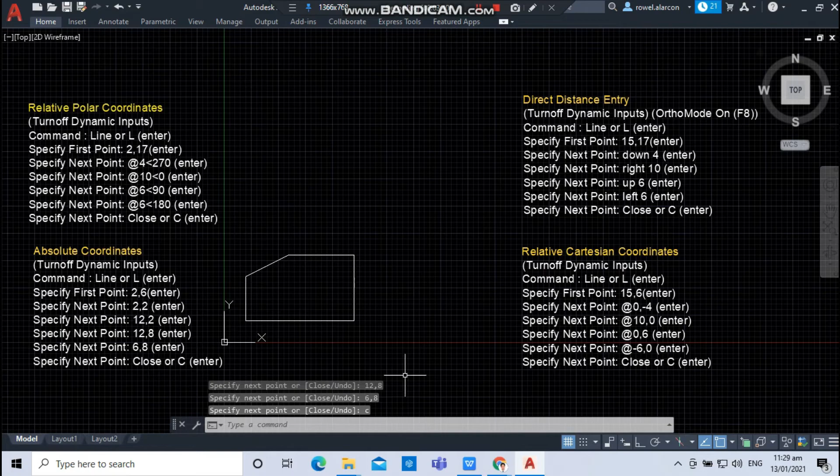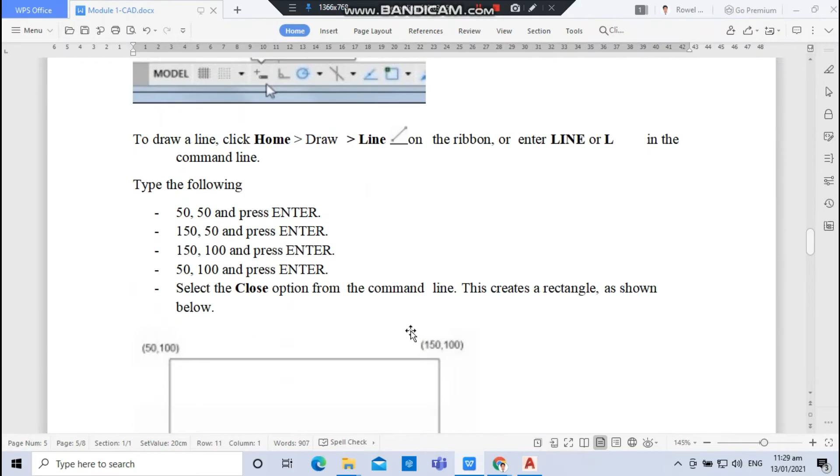In this example, you will draw lines by defining its endpoints in the relative coordinate system. In the relative coordinate system, you define the location of a point with respect to the previous point. For this purpose, the symbol @ is used before the point's coordinates. This symbol means that the coordinate values are defined in relation with the previous point.

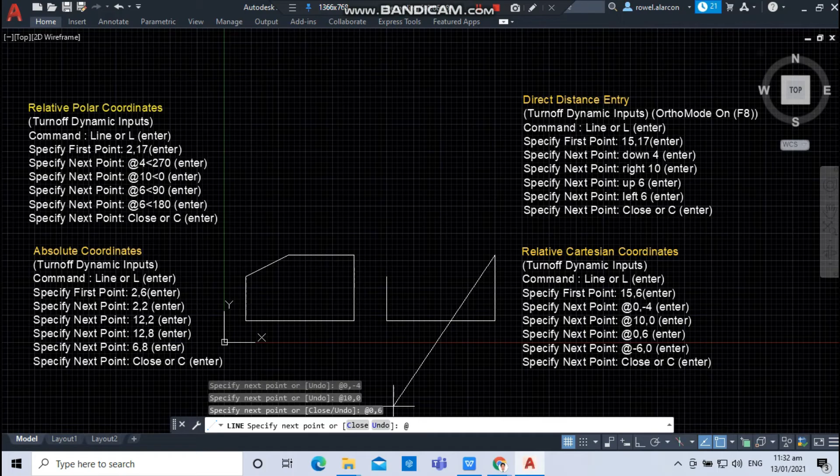In the polar coordinate system, you define the location of a point by entering two values, distance from the previous point and angle from the 0 degree. You enter the distance value along with the @ symbol and angle value with the less than symbol. You have to make a note that AutoCAD measures the angle in anti-clockwise direction.

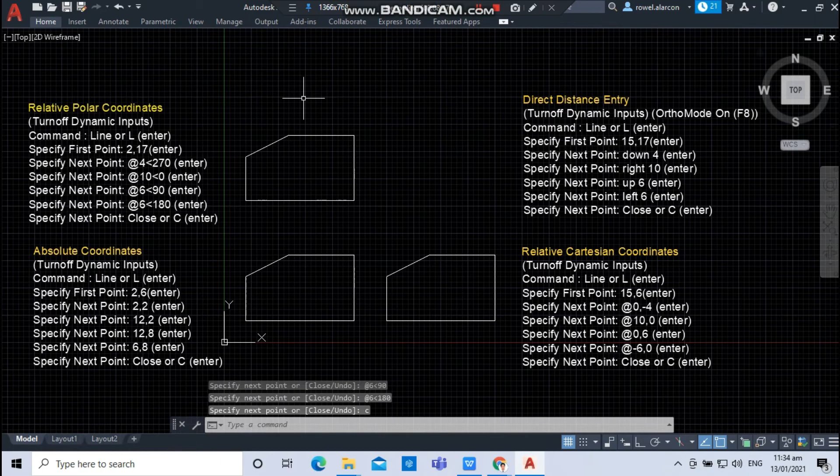So, in direct distance entry method, you draw a line entering each distance and angle values.